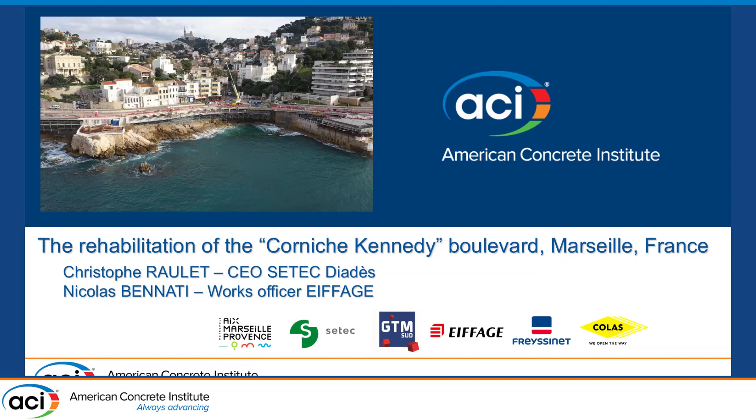So the Corniche Kennedy in Marseille is a coastal road that runs along the Mediterranean Sea. It was named in 1963 as a tribute to the American president. So after the Kennedy bridge, we have the Corniche Kennedy. John F. Kennedy, the president assassinated the same year of the commission.

The major road in the city of Marseille allows vehicles to connect the southern district to the city center, and consequently makes the Corniche a particularly busy road. Its bicycle paths and pedestrian layout on the seafront make it a must for residents and tourists.

The coastal road, built between 1844 and 1863, was widened between 1954 and 1968 to create a pedestrian promenade overlooking the sea. The widening structure is made of corbels on which a slab rests. These corbels are distributed every 4 linear meters and are anchored in a continuous retaining wall on a bridge.

The superstructure is made up of 2 sloping sidewalks separated by a bench, known to be the longest in the world, and a parapet at the end of the structure.

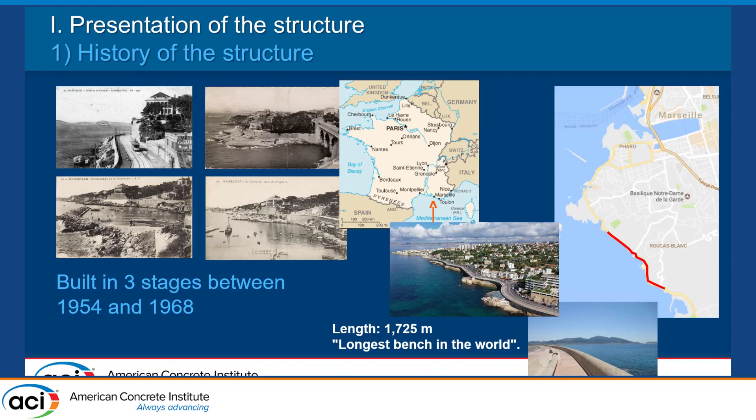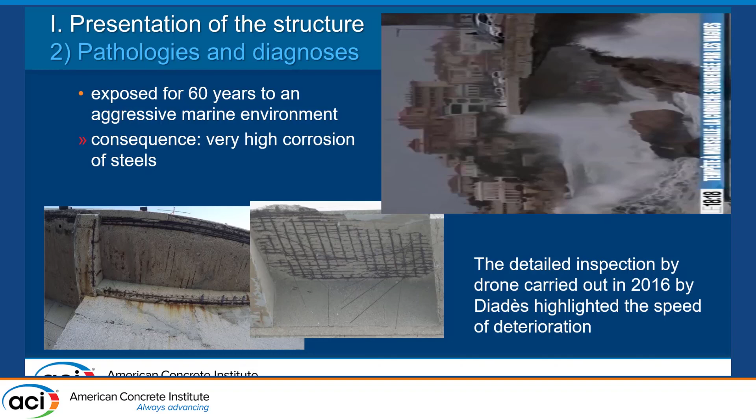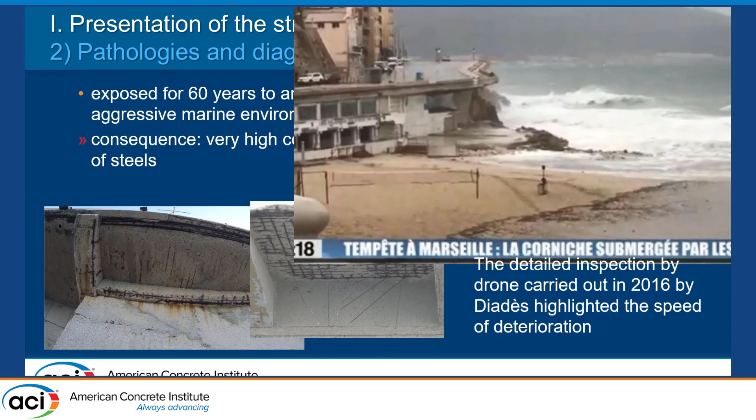For more than 60 years, the Corniche reinforced and prestressed concrete structures have been subjected to a particularly aggressive marine environment, as you can see. Indeed, the structure is in permanent contact with sea spray, and as the waves are hitting the rocks below, they splash the underside of the Corniche. As a consequence, the Corniche presents many apparent disorders.

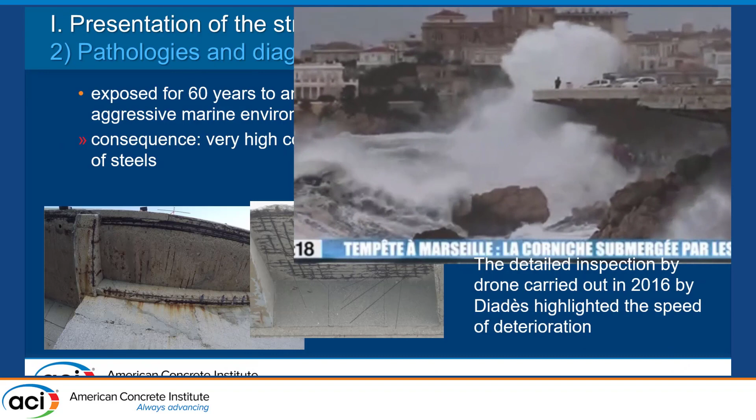Many apparent disorders: rust traces, cracks with traces, spalls, and even detachment of the concrete by plate with the rebar exposed. For these 4 main elements, depending on their stage of deterioration, after an important diagnosis, the choice will have to be made between repair, demolition, and replacement by a new element.

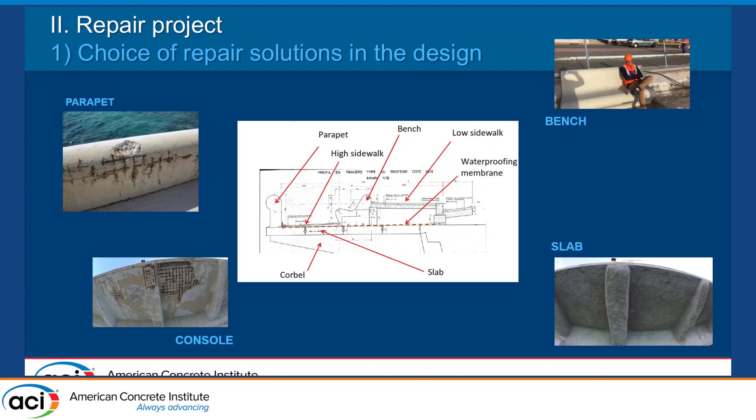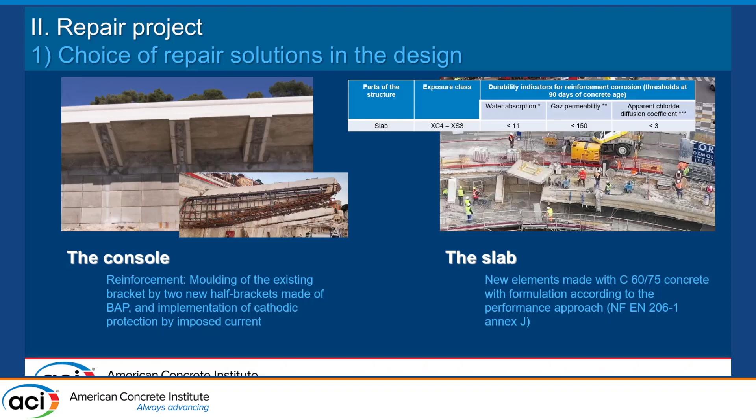The slabs have been removed and replaced by new prefabricated elements. The formulation of the concrete used to fabricate those new slabs has been selected following a performance approach aimed at respecting threshold durability indicators regarding rebar corrosion: water absorption capacity by immersion under vacuum, gas permeability, apparent chloride diffusion coefficient, and electrical resistivity. A waterproofing membrane has also been applied on slabs.

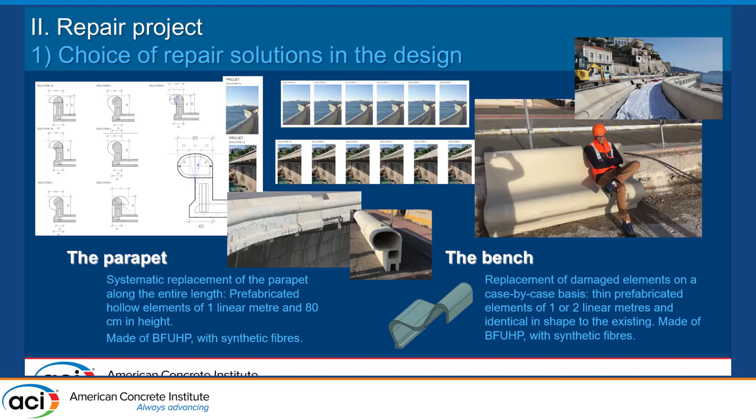The bench and parapets have been removed along the entire Corniche length and replaced with new prefabricated ultra-high-performance fiber reinforced concrete elements. Fibers are synthetic organic fibers to ensure a better aesthetic durability against corrosion.

As you can see, we made a lot of design with the architect to choose the best design for the new bench. And they are designed with the same profile as the existing benches, because it's very important in Marseille when you're sitting on the bench to see the seashore. As you can see, we made a special design. As I said before, with the architect, we worked in detail on the head width.

Hello, everybody. Sorry for my English. Approximately.

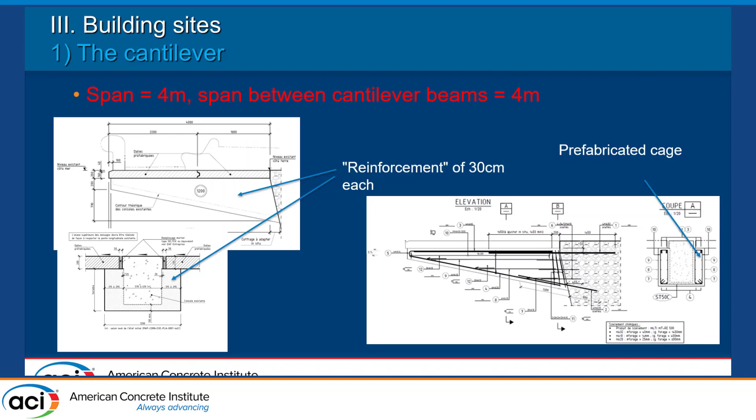The structure is composed of cantilevers of length 4 meters. Spacing between 2 cantilever beams is 4 meters. To repair a cantilever, we reinforce it from either side with 2 beams of 30 centimeters each with an ICCP system. First, we install a prefabricated cage with the ICCP system. To make the reinforcement, we use two steel formworks and concrete each day 2 cantilever beams with self-compacting concrete.

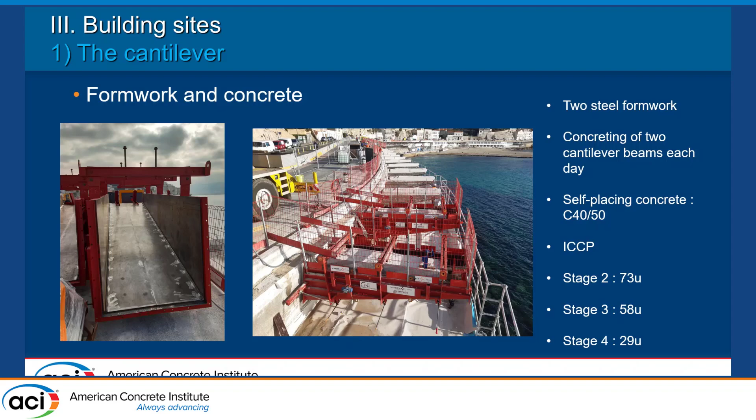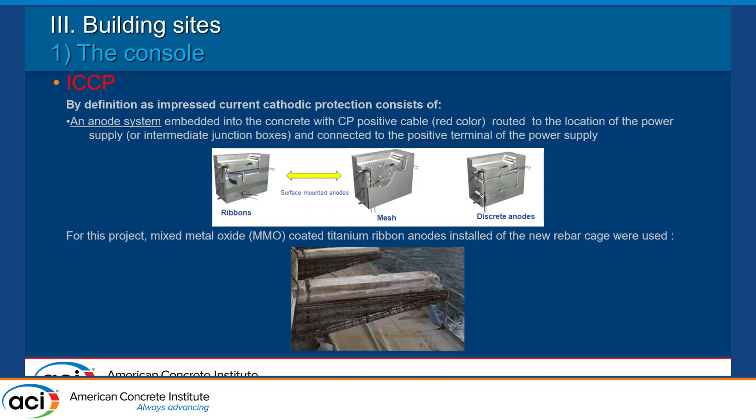By definition, as impressed current cathodic protection consists of an anode system embedded into the concrete with positive cable routed to the location power supply and connected to the positive terminal of the power supply. For our project, we installed mixed metal oxide-coated titanium ribbon anodes on the new rebar cage. After we installed the ribbons, we connected the negative connection to the rebar cage, with cable routed to the power supply and connected to the negative terminal.

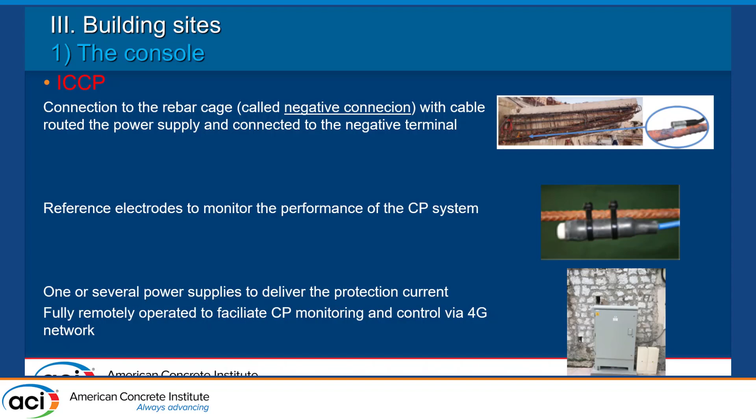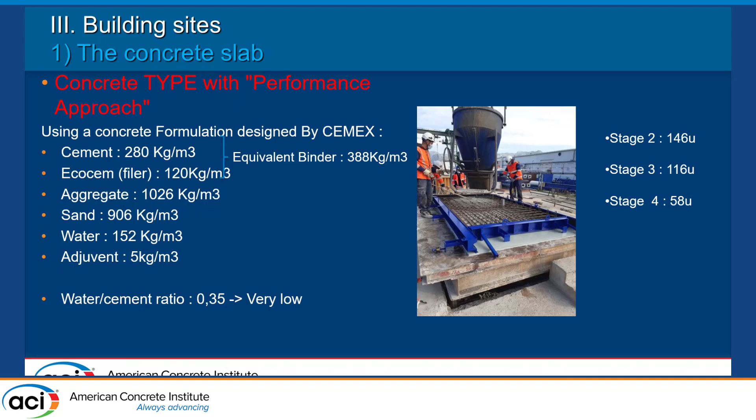To measure the system performance, we installed reference electrodes in concrete. All data monitoring is controlled via 4G network. To protect against the aggressive marine environment, we used two special concretes with a performance approach. Concrete must meet durability performance indicators. Using a formulation designed by CEMEX, main components are mixed in specific proportion: cement, Ecocem filler, aggregate, sand, water, adjuvant. And the main indicator is the water cement ratio. It's very low, 0.35.

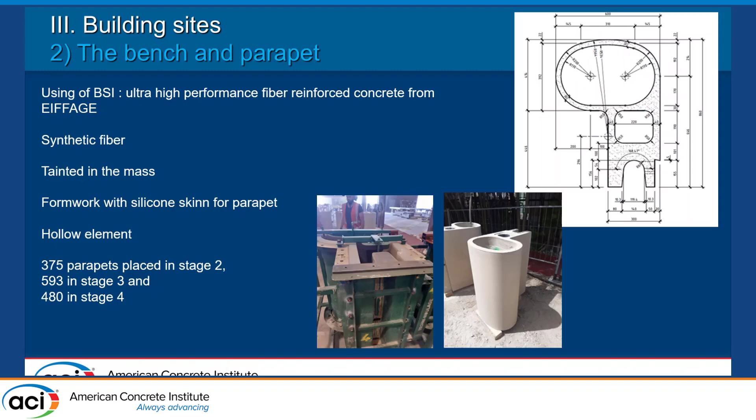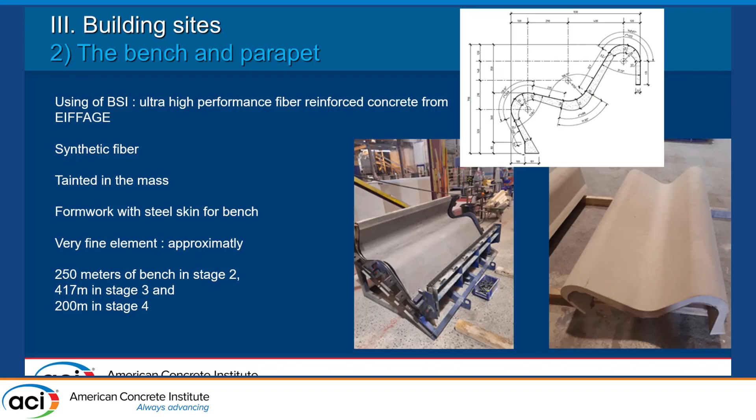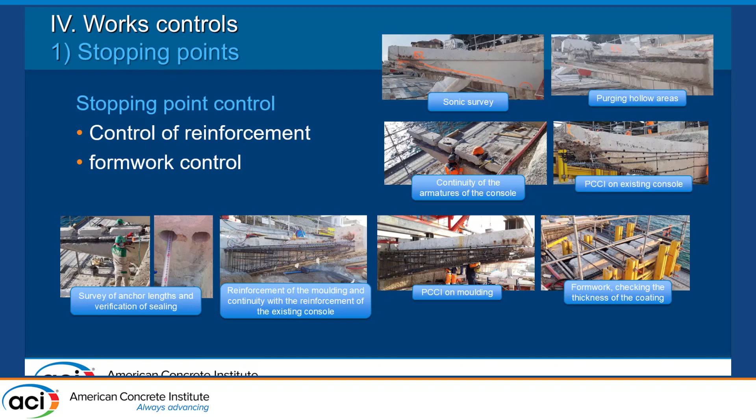To finish, during the work, many controls were carried out by all parties involved at each stage of the work. The cathodic protection was the subject of several stop points, which required formal agreement from the supervisor before the work could continue. Verifications of the existing corbels repairs: to do this, the resistance between two materials must be less than 1 ohm. Verification of the absence of short circuit between the anode tapes and the cathodic protection repairs. Verification of the negative connection of the repairs for a return of electric current to the rectifier.

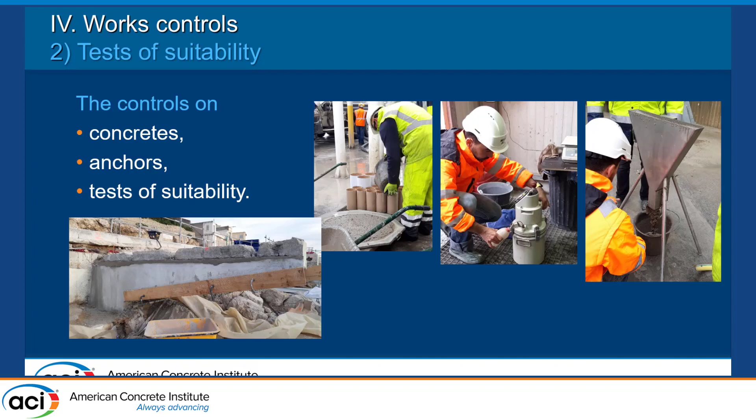The materials used in the new elements were also subject to many controls, particularly the concrete used for the prefabrication of the new slabs and developed with a performance approach. Now, just a film to explain to you in detail the project.

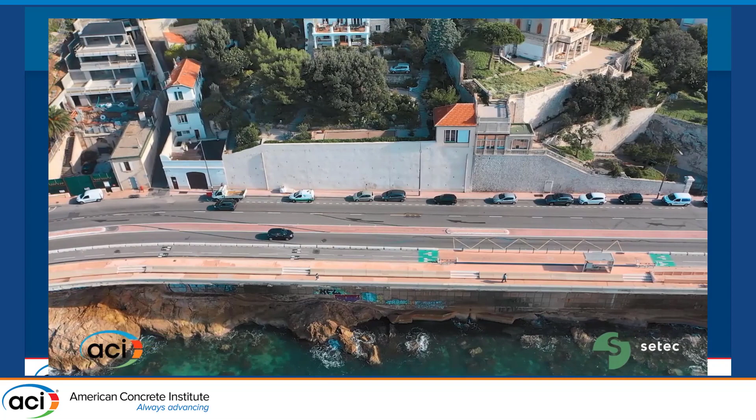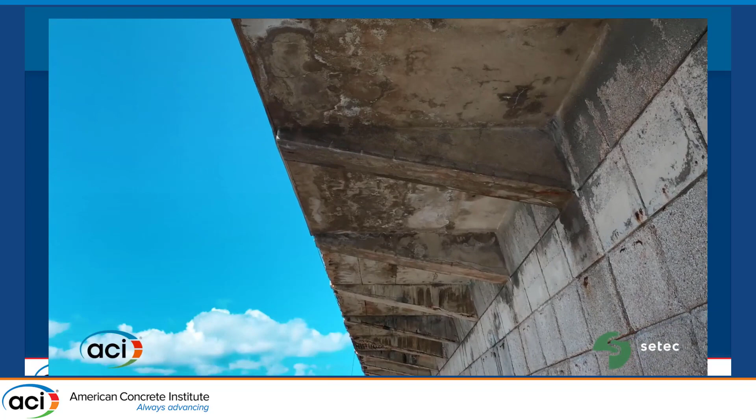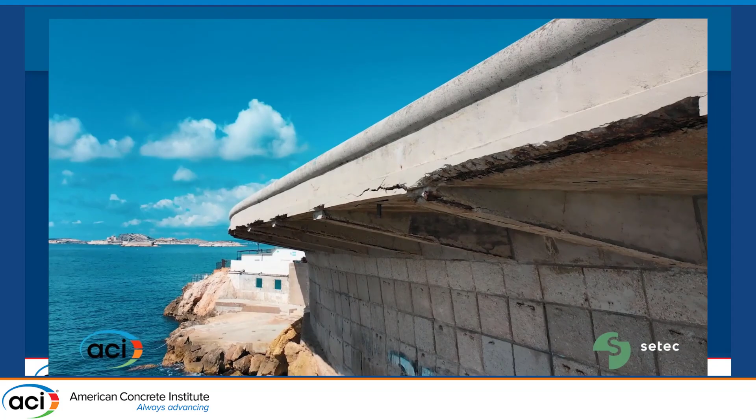The Corniche Kennedy in Marseille, in France, named in homage of President John Fitzgerald Kennedy, is a road that runs along the Mediterranean Sea. Located in a classified site, it was widened in the 60s to create a cantilevered pedestrian promenade over the sea. For more than 60 years, the Corniche has been subjected to an aggressive marine environment and therefore presents many disorders. The Metropole of Aix-Marseille-Provence has therefore decided to launch a large repair project.

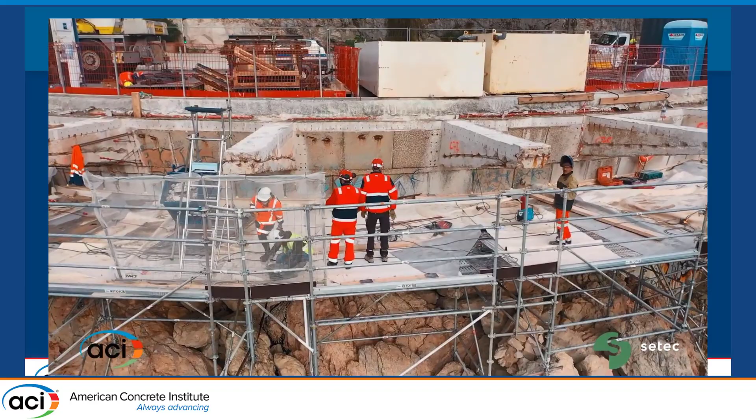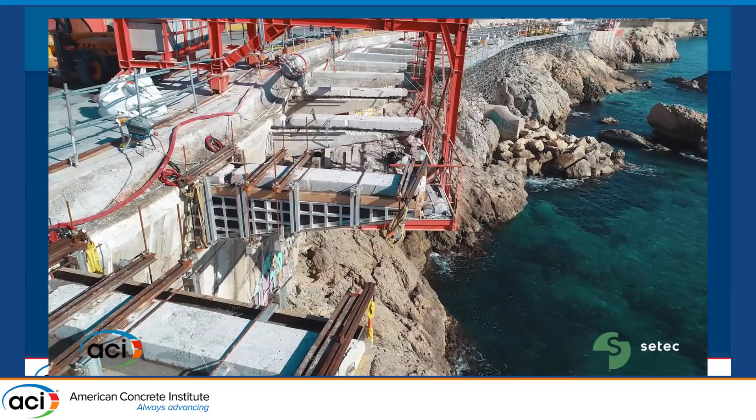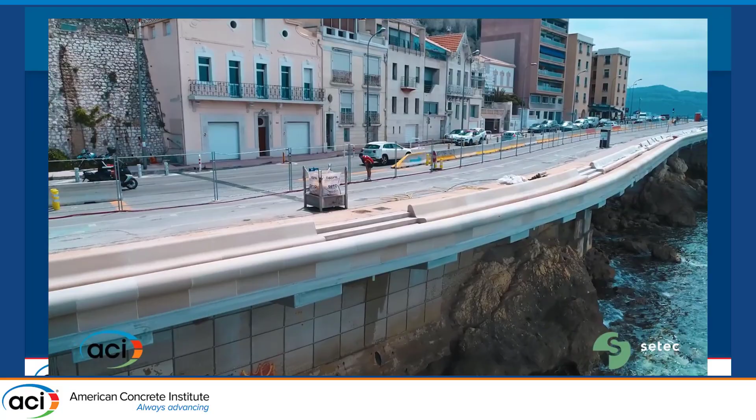The work took place between 2018 and 2022 and consisted of repairing and replacing structural elements. Innovative materials and techniques such as concrete using a performance approach, ultra-high performance fiber reinforced concrete with synthetic fibers, and a cathodic protection using impressed current were used to prevent and protect the structure from corrosion. After more than 4 years of work, the Corniche was reopened to the public in spring 2022 for a new life in the glorious memory of President John Fitzgerald Kennedy, who died the same year as the first opening.

Just to conclude, I just want to say we're very proud to be here to win this award. Thanks again to the organization, thanks again to the committee, and especially because we gave a new life to the Corniche Kennedy, in memory of President John F. Kennedy, who died almost 60 years ago. So we're very proud of that.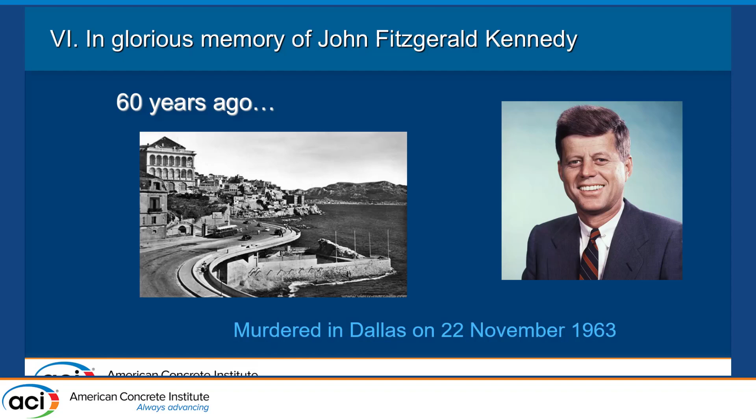Thanks a lot. And to thank you, I just wanted to say special thanks to the 3 wonderful girls. 2 are here, yes. Julie and CAL, they were the 3 young girls who piloted, raised, and controlled a large part of this work. Thanks to her, thanks everyone.